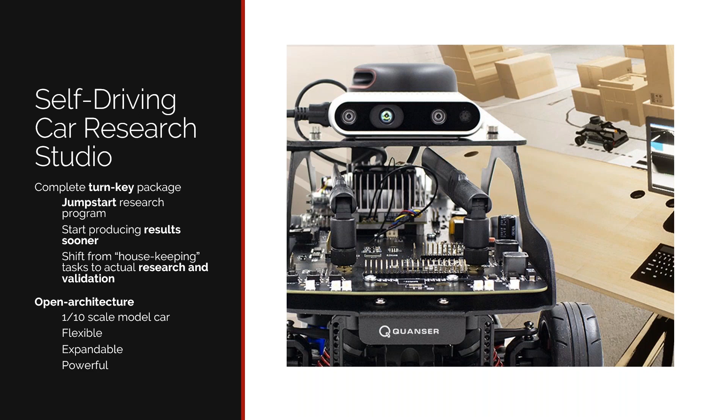This is an indoor setup with a 1/10 scale model car, so you can do a lot of repetitive experimentation and development in a very efficient, indoor, and safe environment. The star of the research studio is the QCar, a 1/10 scale model car with a very powerful embedded compute processor, the NVIDIA Jetson TX2. We also added an extensive sensor suite built into the car, as well as a lot of IO capability to enable scaling and expanding functionalities and modules that might not be built into the car, such as plenty of SPI, I2C pins, GPIO pins, and additional encoder channels. On top of that, the mechanical side is fairly straightforward and simple, so it's customizable.

So we can provide all the dimensions as needed to fit any additional mounting and module needs. And the hardware, the frame itself, has been crash tested so that it's very impact resistant, and you can be sure when using the system, things would happen.

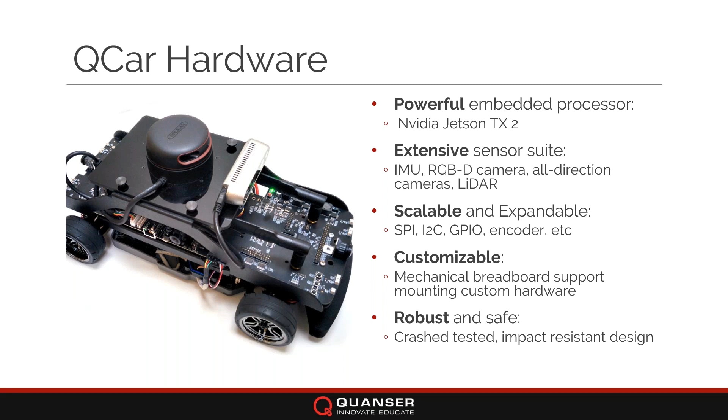We understand, we are part of a research community. Things would happen if you accidentally slam the car into the wall. It's okay. It will most likely survive a few of those before things start getting out of place. And so that means it's robust, it's easy to use, and you can safely explore and experiment.

On the software side, which is sort of what we're focusing on today, we provide out of the box a multitude of different environments supported for development. So, for example, the out-of-the-box examples that we provide have MATLAB Simulink examples as well as ROS and Python examples. And we have application programming interfaces supporting C, C++, and can utilize things like TensorFlow as part of the development.

And so in particular today, what we would like to focus on, as mentioned before, is to illustrate how we can leverage the functionalities and features provided by a couple of the MathWorks toolboxes, and see how we can integrate and combine that with the existing examples that we have from the QCar into different examples to leverage different functionalities, which you can also do with many of the other available packages.

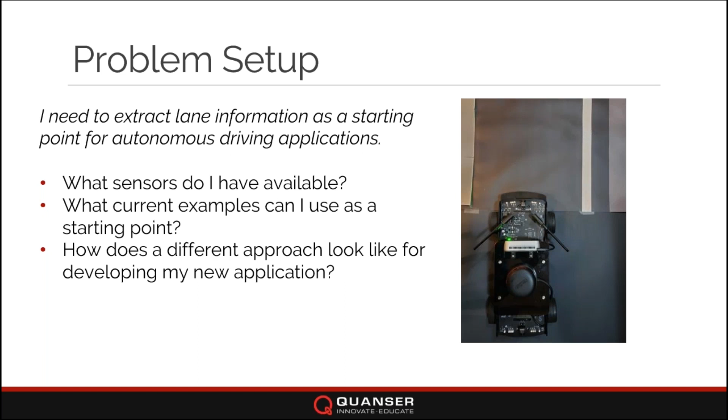Looking at the vision sensors available for the QCar itself, I've got my Intel RealSense, which is an RGBD sensor. So I can get depth information if I want to detect distances to obstacles that are in front of the car, and I also have access to 4 CSI cameras, which are wide angle and give me a 160-degree field of view. And this is the sensor that I'll be focusing on today for the vision-based applications.

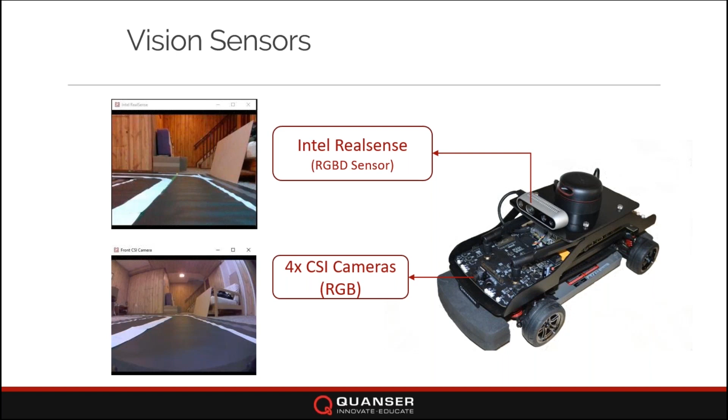So now that I've figured out what problem I'm trying to solve and what sensors I have available for image processing, let's look at our starting point. So out of the box, what does the image processing portion of our example entail? It's a focus on image processing for identifying lane properties. In our standard demo, we're looking at extracting a region of interest from our CSI cameras.

Using our QUARC blocks, we can do some image thresholding to extract a specific color. In this case, I'll be showing a color for a white portion of the lane, but if I was looking at different scenarios, I could be extracting red or green. And then using a linear polynomial function in order to identify some useful properties for that lane.

Specifically, I'm going to be using the equation of a line, y = mx + b, in order to identify how far away I am from that line and what the slope is, so that my car can safely navigate throughout my environment. So what does this approach look like? The first step is taking our RGB image and extracting the HSV properties for it.

So HSV image spaces are far more robust and allow me to really nail down what specific color I'm trying to extract. As part of our QUARC toolboxes, one of our specific blocks, the video display block, actually gives me very interesting information. I've highlighted here a pixel located in space. I've got its RGB values, but I've also got its HSV values.

So when I'm trying to do thresholding, I can really go inside an image and see what its HSV values are and identify the range that is available for me so that I can identify a binary image of my important information. Now, once I've identified this image, extracting my important information, I can now look at my steering angle itself.

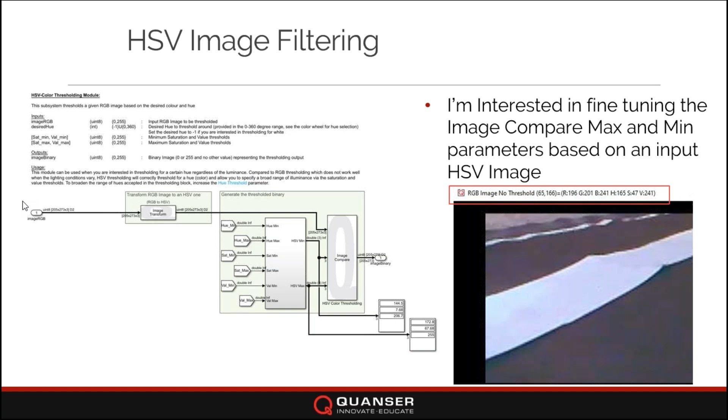So how do I calculate my steering angle for this specific application? I extracted a series of pixels. I then fitted them through a polynomial function, polyfit, as we can see as the first portion of my system. And then in my next function, what I decided to do was looking at how I can modulate that slope and line intercept. And so the further I am away from my image, the further my lane gets from me.

So I can envision my y-intercept getting further away from me. My slope angle also lets me know which orientation the lane is going so that I can modulate my heading angle. And so by combining the two, I have a way of figuring out, one, how far away I want to track the lane, and also what that angle would be like. And so this gives me an out-of-the-box example for following a lane.

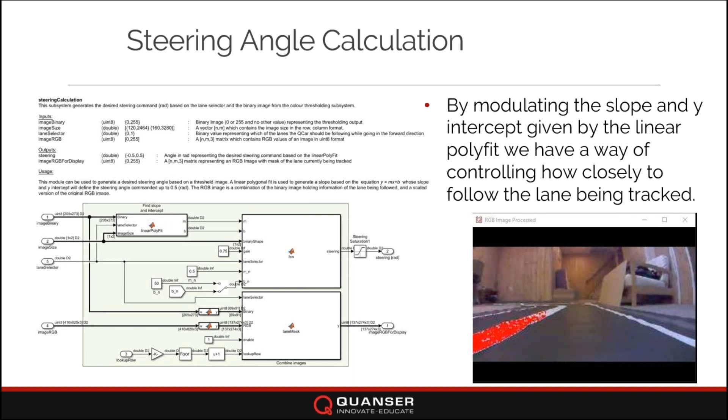But what I want to emphasize here is this is a subset of everything that is happening with the car. As I mentioned, we're using the Intel RealSense, which has a depth sensor, which allows me to identify obstacles that are away from me. I can also choose how far away I can track that obstacle so that I can come to a safe stop.

We also have an initial implementation of a speed controller, which uses our encoder values to get an estimate for speed. We're also looking at turning radiuses so that we can figure out when to slow down and when to speed up, depending on where the car is going. And as a research tool, say you're interested in developing your own image processing algorithm, we also give you access to the computation timings so that you can figure out where optimizations are needed as a first pass in Simulink.

And then, as Gilbert mentioned, we give you access to C++ code. So everything that you see here gets turned into a set of code that gets downloaded onto the car, and you can really go in and make optimizations in that end. So as you can see in this example, we give you full access, but this would be the starting point.

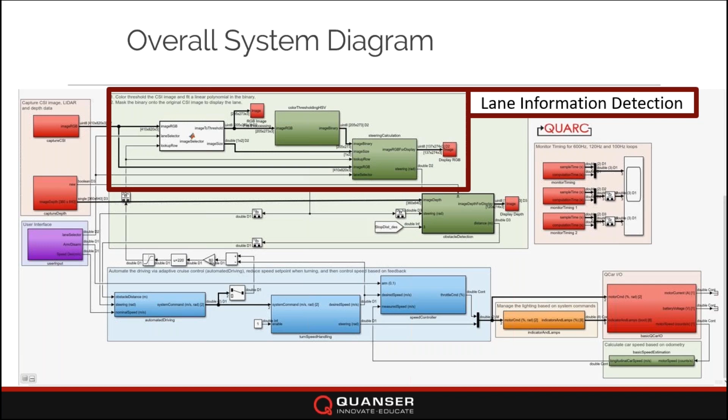So now that I figured out that my controller is using image spaces, I'm manipulating images, how can we take a separate approach to identifying lane information? And this is where leveraging the MathWorks toolbox comes into play. So as a first pass, let's look at the toolboxes that I'll be using. The first one will be the image processing and computer vision toolbox, which allows me to get the intrinsic parameters for the camera.

If you were present in our AprilTags webinar, you will know that in that specific example, we're identifying the pose of the car based on an AprilTag that was in front of me. I used the computer vision toolbox in order to figure out what the intrinsic parameters for the Intel RealSense camera were. And now for this specific application, I'm leveraging the automated driving toolbox to get access to a bird's eye view. A top-down perspective of the vehicle allows me to get a different view of the lane so that I can identify different information in comparison to the example that I was looking at earlier.

And so now looking at the Vision Systems toolbox, there's a camera calibration tool. And so my first step was to get a data set of images. So as you can see here, I took my laptop, I taped down a checkerboard. I figured out the size of each square of the checkerboard itself, a 25mm checkerboard.

And with a set of 8 images, I was able to identify pretty much what the focal length was, the principal point, the radial distortion. Since I am using the CSI camera, there's going to be some distortion due to the wide angle nature of the lens. But this allows me to get a full model of this camera on the car.

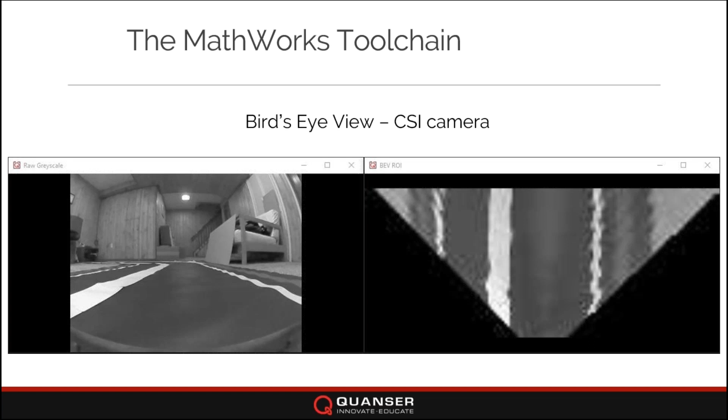I'm still using pixel coordinates in this case, as this was the first portion of my overall image processing pipeline. And now we can go back and incorporate it into the QCar itself. So what does that lane information extraction pipeline look like? I am generating my bird's eye view image at the beginning. And once I've extracted a region of interest, I now use my QUARC Image Compare block in order to identify which portions of my grayscale image really represent the lane itself.

I've also used a high pass filter in order to get a rudimentary lane detection algorithm going so that I can really identify just the transition in between the lanes. And then using some more MATLAB functions in a state machine, I'm able to figure out which portion relates to my left lane and which portion relates to my right lane. Now, once I figured out that information, I can then, using a polynomial fit as well, figure out what the slope of my lanes are, and then figure out what a heading angle should be.

And what I'm going to be passing through to my lane keep assist algorithm is the center of the lane. In this implementation, I'm not biasing myself to either the left side of the lane or the right side of the lane. I'm more focused on maintaining a safe distance from either side of the lane. So what is the output of my lane extraction algorithm? It ends up giving me the following image.

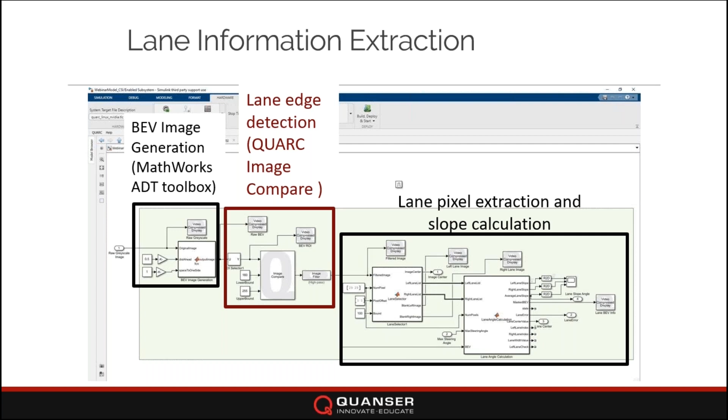I end up getting a filtered image on the left-hand side, which is once I've changed the image through my image compare and I figured out the edges. I can also see the effect of having different widths of lanes and how that would affect that filtered image. And then on the right side, I can see of that portion what is the lane itself, which is coded in green, red, which is the heading angle that the car should be, and a little white pixel, which pretty much defines what the center of the image is.

One useful thing about using the bird's eye view is I know my CSI camera is centered fairly close to the center of the car. So the center of my image is pretty much going to be where my car is headed. And the center of the lane is where I'm going to try to keep. And so using this pixel information, I can now set up a lane keep assist algorithm, which is the next portion of my solution. It's fairly common to use a PD controller in a lot of controls applications.

In this case, I'm using a PD controller in order to modulate how far away I am from the lane so that I can safely and smoothly maneuver myself around the test track. I noticed through experimentation that my gains while going slowly were slightly different than when I was going faster. So I gave myself more leniency.

The slower I was going, the offset between myself and the center of the lane would allow me to change my heading much faster. Whereas the faster I was going, I was mainly dominated by the lane slope angle, and then the adjustments would be minute. If my adjustments were made to be too aggressive, my car would go unstable.

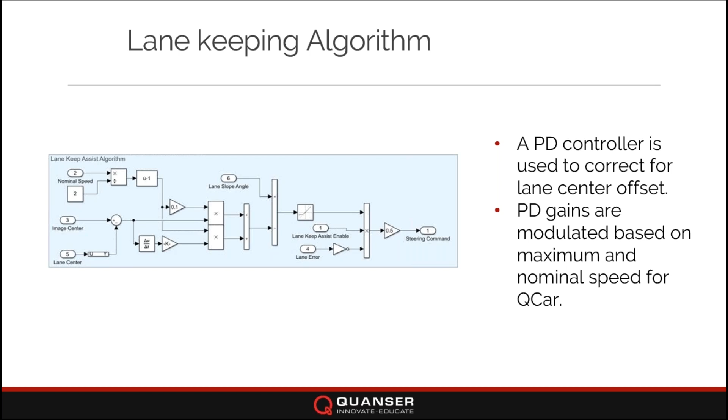And this is also due to the fact that my camera is on my car. So if I'm moving very aggressively, my image is changing very quickly. The image acquisition is being done at 80 Hertz. So if I start to go unstable, my estimate starts to go very, very wildly. And so this is why I decided to use this implementation by linearly changing my gains as a function of my forward speed.

Now, once I've put everything together, what does my overall example look like? So you see on the left-hand side, the lane keep assist algorithm is fairly similar to the initial one that I started with. I'm not doing any object detection in this case. I'm mainly interested in just keeping the lane. But I can see as I drive around our test track, the car does a fairly good job at maintaining the center of the lane.

I can also dynamically change the speed to go slower or faster. And I was able to accomplish this going as fast as 1.5 meters per second. And so we can see just from the bird's eye view, if I play it again, the further away the lane is, there's a little bit more distortion. So I'm following closely the segment of the lane that is closest to my car.

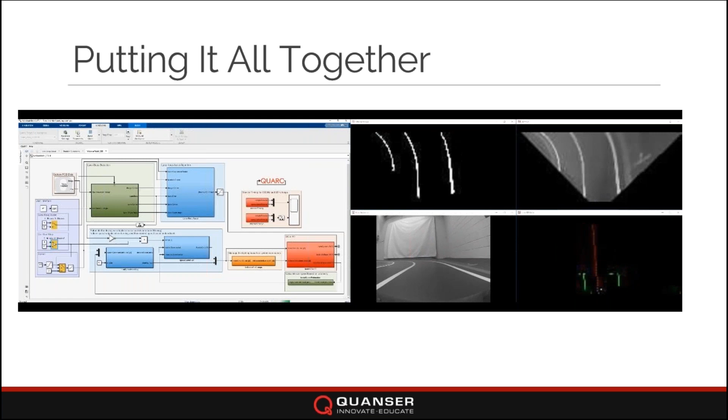But this ends up becoming just a small subset where the image processing is the top left green subsystem. The lane keep assist is the right blue subsystem. And then everything else is maintained exactly the same as I was doing before in order to show what it would be like to modify one of our out-of-the-box existing examples.

And so just to conclude and let you know how powerful our solutions can be, we've looked at two approaches for extracting a lane. I've looked at extracting a lane via color and HSV thresholding as one way of figuring out what my steering angle would be. And then looking at a hybrid approach, which leverages the work that's been done by MathWorks in order to develop these toolboxes, which is to expand my applications. Given this, I now have a sensor for my model.

And the specific sensor for the camera will then allow me to look at object detection in a far more interesting light, because now I can extract distances from the image, because now I can figure out what my intrinsic parameters are. And so the kinds of applications moving forward can become far more interesting. I was using pixels in order to keep my lane, whereas I can now convert it into distances if my pipeline is then dependent on using distances versus using pixels.

I've got two sensors on my car which are looking at the lane, the front CSI camera and the Intel RealSense. The advantage of having an elevated RealSense is it can look further ahead than what the CSI can do. So if I was to combine a bird's eye view from both of those sensors, I can get a far more robust approach at figuring out what my lane is. And if I was to maneuver around and do some intricate path planning, that is another example that I can do. But this ends up setting up my example pretty much to move on from here.

This is one of those things that we at Quanser always love to do. Once we release a research solution and a research studio for our customers, our engineers internally are always one of our first customers, really, where we start taking what we release as a platform and actually trying to apply all the various activities that you, our customers, and our partners in research are always doing already.

And we try to take some of the most recent developments, and in this case, really looking at all the great toolboxes that the MathWorks is releasing, around image processing, around computer vision, around autonomous driving, and so on, and seeing which ones can be readily applied directly on our system. We have been working with the MathWorks for quite some time now, and for many of our products, the MATLAB Simulink interface is the user interface to that product.

And in the case of this self-driving car research studio in particular, a lot of our forward-looking examples are trying to see what new tools and new offerings from the MathWorks can be deployed directly on the car and on the vehicle itself.

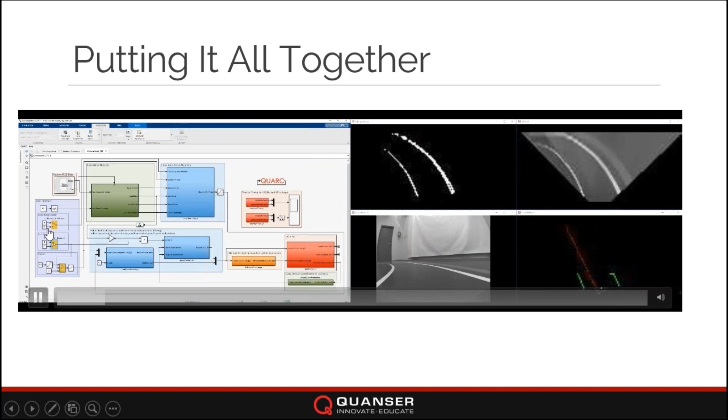Only caveat being is it does require the Automated Driving Toolbox, but you can definitely take the little snippets that we have designed here and use it in your research. So if you're interested in the lane extraction portion of the example, you can go in and take the portion that is specific for what you're looking for.

Likewise with control, you can look at the lane keep assist algorithm and use that in your research. Or you can also develop one on top and see how yours compares to ours as a way of optimizing or improving what we've done. At the end of the day, we want to give you an example and then really allow you to take it to the next level by implementing the ideas that you have developed.

John, there's one question that I'll field, but maybe in the meantime, if you want to pull up, there's another question someone's asking to actually see maybe the vehicle driving. This is all from the vehicle's point of view. I don't know if you have one that you shot that maybe you can pull up as it traverses the circle that you've created there. And while you look for that, there's this question that I'll sort of field as well.

So one of the participants says, "Thanks for the great presentation, John, and demo. Do you have a simulation model of the QCar for developing applications and simulation without the car?" And again, fantastic question. We at Quanser are always making sure that all of our systems have accurate mathematical representations, different models through many different paradigms. I mean, Simscape is one example of a paradigm you could use to develop a model or bring one to life.

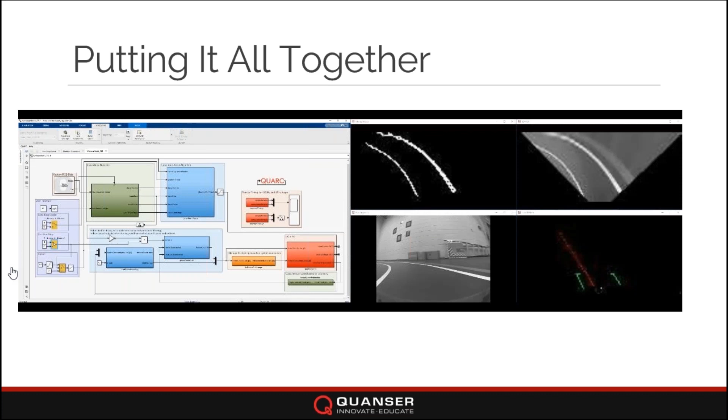And so we publicize all our examples for people to look at, and not just take it from us, but also be able to comment on it, and if any improvements are there, or if we're lacking one consideration, we'd love to hear that feedback and improve the full offering for all our customers and all our users out there as well. So we do encourage you to try it out. Just go on our website under courseware and resources, and you'll be able to find many content and application pieces around the self-driving car research studio.

And I see John actually found the video, so go ahead, John.

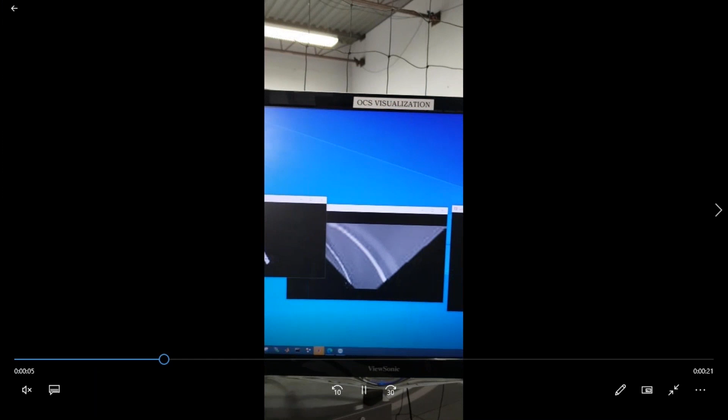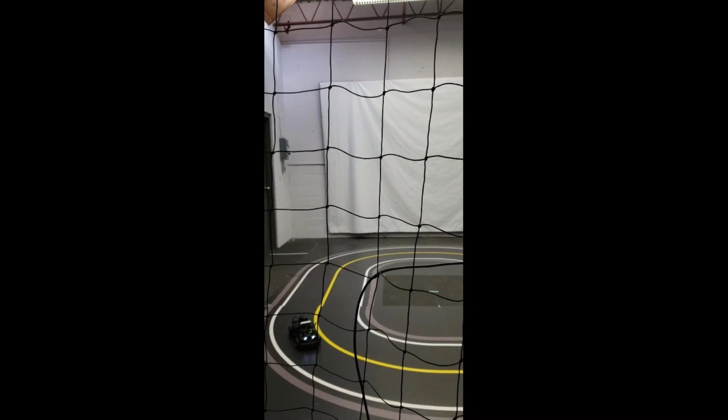Yep. So in this video, I'm showing pretty much the detection being done in real time, and then I can see my car driving around the test track. This is just for us to be able to see in real time how the car is performing. I'm maintaining my lane. I was going slightly slower in this example, about 1 meter per second. I can start it again if you'd like to see.

But this was the Simulink diagram I showed you a second ago. This is my filtered image with my bird's eye view. And then I can see the lane being tracked. So I can monitor all my sensors in real time, which is nice because I was able to fine tune my parameters. My PD controller needed a little bit of adjusting, but I can do this all on the fly.

I didn't have to worry about preloading and then having the car do 4 loops, for example, and then seeing the information afterwards. Which is also part of the flexibility that we offer: you can really see what the car is doing in real time, stop it, make adjustments as you need, and then keep going. Just to figure out what needs to be fine-tuned, or if you would like to make a big change, recompile your code and rerun it again.

Thank you, John. That's great.

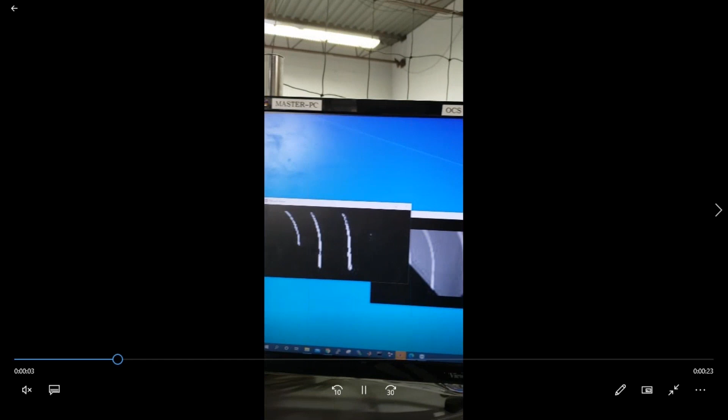And for those of you who are wondering, the netting is not to protect John from the car. This is also the same space that we fly our drones, which have the same functionality as well, as John mentioned. So the whole paradigm of deploying and generating your applications in that MATLAB Simulink environment, but being able to deploy that directly on the vehicle. So the actual code is running on that vehicle, but the Simulink environment is streaming the data in real time, and you're able to, like John mentioned, tune parameters, change a couple of switches, and really immerse yourself in the application as it's running, and make the adjustments in real time as you see fit.

And this is just one of the roadways, just to mention that our self-driving car research studio comes with a nice complement of roadway packages that you can configure in very different configurations to achieve the type of scenario or environment you're looking for. Plus, we provide signage. This is a 1/10 scale, so we provide 1/10 scale signage that you can use: stop signs, speed limits, other signage that you can train your car to react to, or to identify and do something about as well.